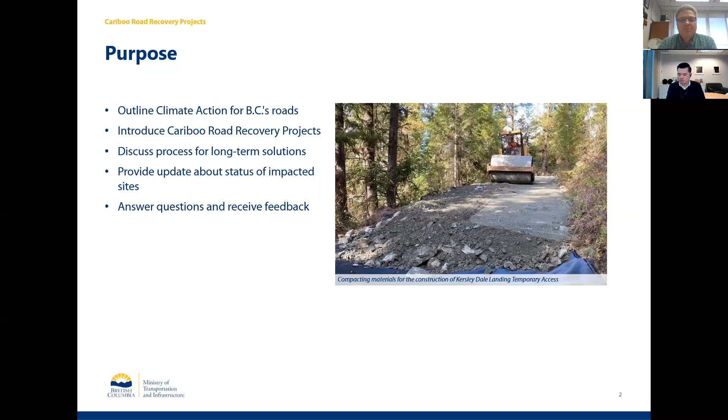Before I get into the Cariboo Road Recovery Projects themselves, I want to take a moment to acknowledge that the entire province, and particularly the Cariboo region, has been impacted by extreme weather events. The Ministry of Transportation and Infrastructure has continued to evolve our strategy to consider this important factor. For work planned around the province, it is a requirement for the ministry's design engineers and consultants to consider how future climate events will affect infrastructure and what can be done to make our roads and bridges more resilient so they remain reliable and open.

Examples include pile driving bridge footings, upsizing culverts, bridging areas of concern where culverts are no longer suitable, redesign of drainage channels for future flow, and better armoring of slopes. This approach means appropriate climate adaptation is considered over the entire design life of our infrastructure.

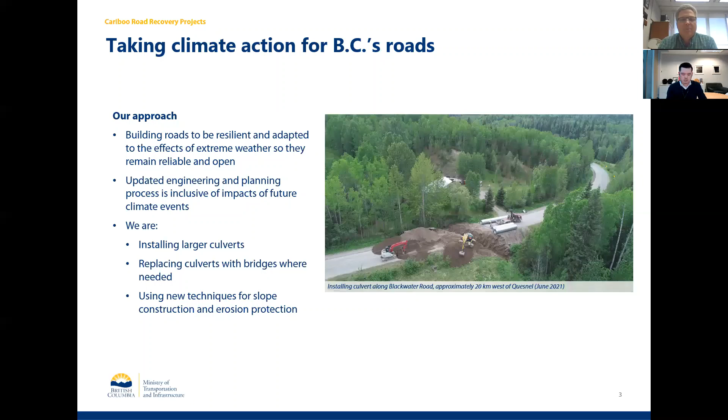To support this, the provincial government, with federal support, has made significant investments since 2017, totaling $580 million province-wide and $230 million in the Cariboo alone. Currently, $146 million has been committed to the Cariboo Road Recovery Projects for engineering work for 9 sites and construction of 1 site, the Kersley Landing. That's a very significant commitment that really is important for the program.

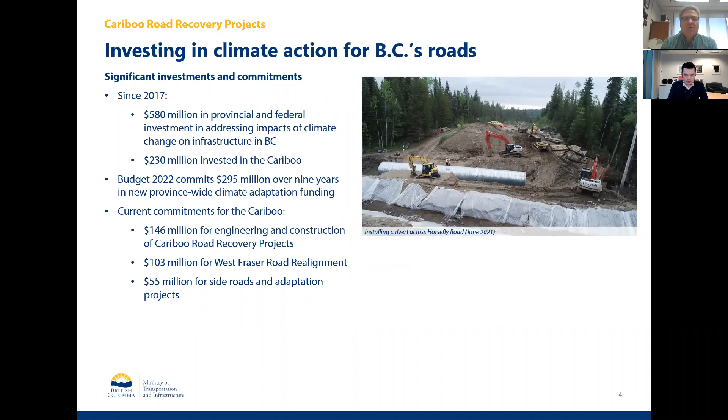As mentioned off the top, the Cariboo region has been impacted by extreme weather events, leading to an increase of water in the ground and landslides since 2020. The Cariboo Road Recovery Projects were formed in the spring of 2021 to deliver safe, reliable, long-term, and climate-resilient solutions for road impacts caused by these forces of nature. To get there, we're going through a thorough technical process and have built a team that includes a broad cross-section of professional experts.

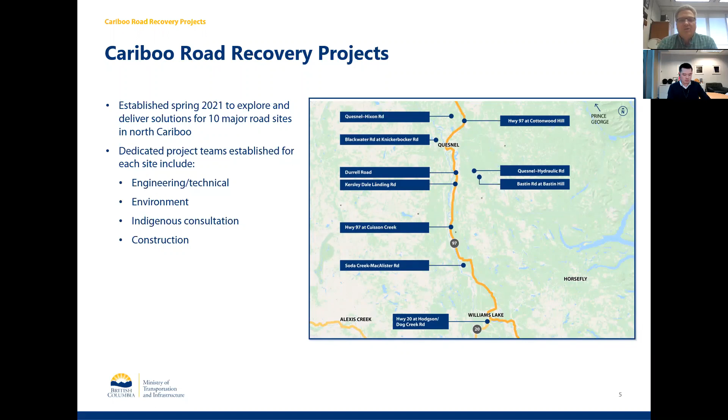We'll also be engaging with and consulting with local residents, Indigenous communities, local governments, road users, and stakeholders to ensure we consider various needs and interests. We appreciate the immediate needs of road users are a priority. Decisions surrounding keeping roads open or establishing permanent alternative access can have a significant impact on one's daily life. We are committed to minimizing these impacts with the caveat that safety has to be first and foremost considered. We have worked to stabilize routes, restoring roads where possible, or establishing alternate routes while we work towards long-term solutions. Some examples have included interim paving to improve the drivability of roads, drainage improvements, and in the case of Kersley Landing, the construction of a temporary access road.

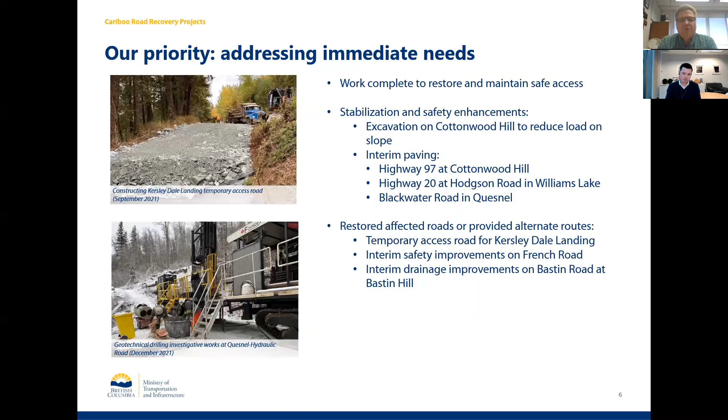To deliver long-term solutions, the ministry is undergoing a thorough multi-phase and technical-driven process. We are currently in phase 2 of a 4-phase process. Phase 1 was a problem definition and needs assessment. During this phase, our teams considered existing, future, and project conditions at each site to help inform the direction of potential options. During phase 2, concept generation and shortlisted option evaluation, we're going through a technical analysis and looking at a number of options at each site. These options are being assessed against multiple criteria to help narrow our list as we head into the next phase.

In phase 3, shortlisted options will be put through a detailed analysis known as a multiple account evaluation process, which I will talk about more on the next slide. This will allow us to identify a preferred solution to be presented to government for approval to advance to the next phase. The final phase is implementation. Following approval by government, we will develop work plans to deliver projects.

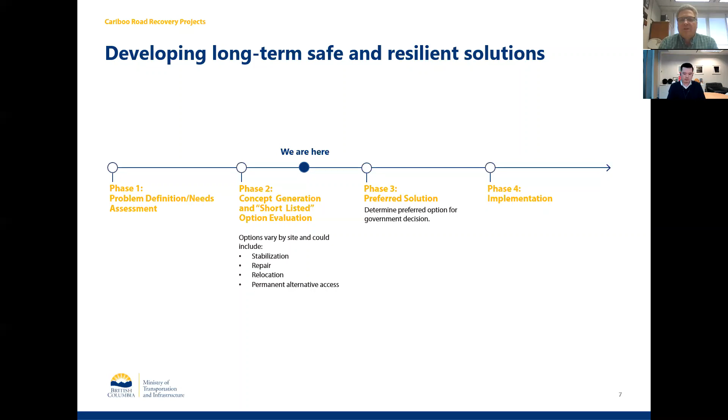So there are a number of criteria that the ministry uses to evaluate potential investments in roads. This is one of the topics we're seeking your input about during this engagement. As with any important decision, there are a number of factors that can influence the ultimate direction you move forward with. This process is no different.

In the discussion guide, you'll find a description of these 5 criteria, but here I will give you a brief overview. Economic development examines the impact of the project on the economy. Some of the things we look at include existing economic activity, like goods movement, and potential development for industries that use these roads.

Customer service looks at the costs and the benefits of the projects to the highway users. Here we're considering things that impact road users like travel time. We're looking at how a decision will impact your daily life, like the amount of time it takes you to get to work or to school, or how the grade of a road may impact cattle movement, as a couple of examples.

Under social and community, we'll examine noise and visual impacts, pollution impacts, land acquisition needs, community connectivity, and consistency with community plans.

Environmental considers impacts of the project on the surrounding environment. We'll look at land requirements, vehicle emissions, wildlife habitat, and water and fisheries.

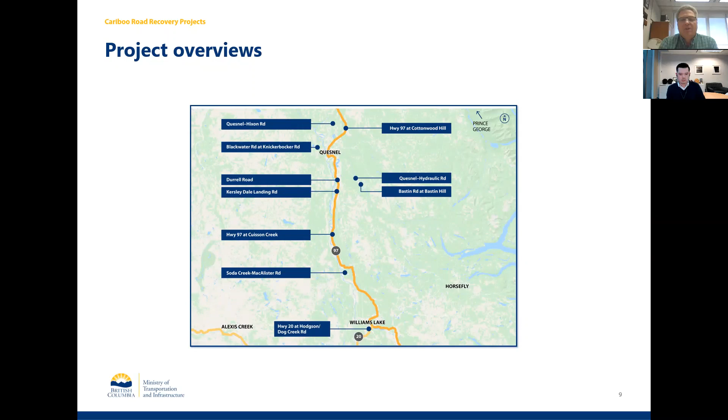So I've talked about our discussion guide and our feedback form, and I'll just add one little piece for you. If you simply Google Cariboo Road Recovery, you'll find our website, and that'll connect you to the feedback form. That'll also connect you to the discussion guide as well. So those are very similar materials to what we're looking at tonight. So if you know folks that haven't seen this presentation, Chris outlined it already earlier, but I just wanted to emphasize that there's still that opportunity to see the information and then provide the feedback to us.

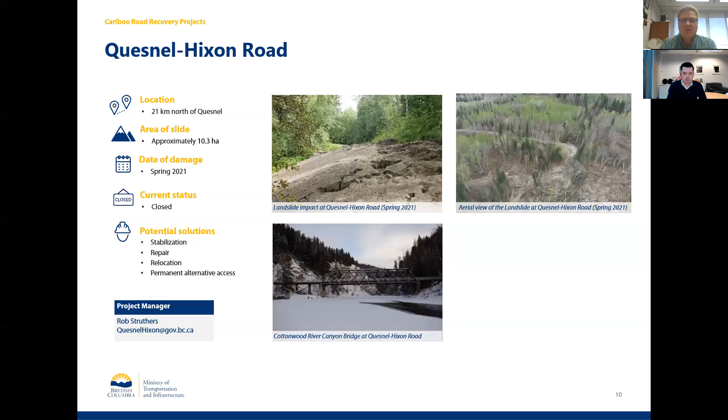So the next slide is an illustration of the slide itself. That's the red highlighted area. The green alignment is the existing, impacted road. The purple and blue alignments are wider options we're looking at, intentionally wide because we need to understand a lot more about them before defining a right-of-way. We need to do more field investigation to understand what we'd be looking at. So what we share here is a sense of the options we're considering for the project, and we'll refine that as we move through it project by project.

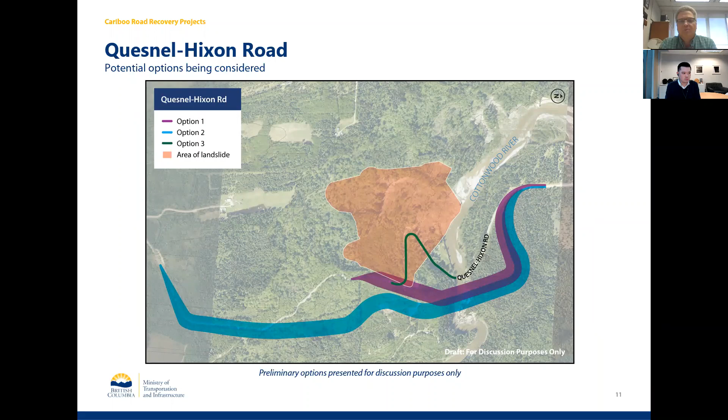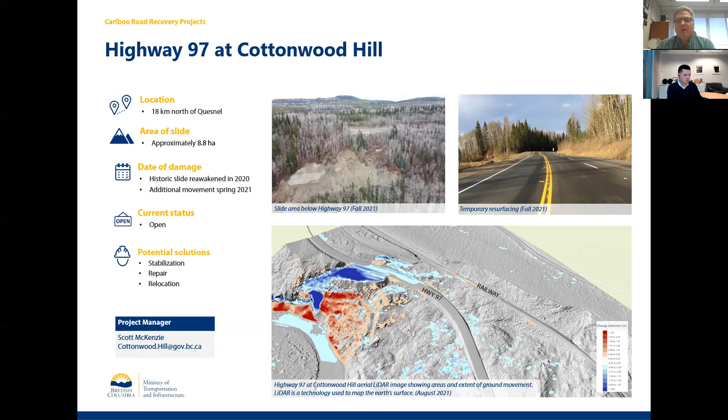Next, we're at Cottonwood Hill. This presentation goes from north to south, so people understand the order of presentation. The next project we'll look at is Highway 97 at Cottonwood Hill. Again, the yellow alignment is the existing highway, and we've got the red slide area highlighted. There are three other options showing alternate alignments being considered for that project.

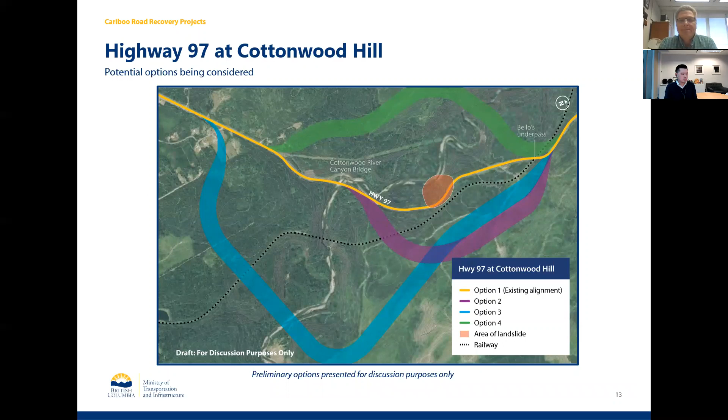Next, we've got Blackwater Road at Knickerbocker Road. I'll just walk you through the images. We've got a slide showing the slide mass, part of one of the slide masses below Blackwater Road going into the Fraser River. You can see some of the temporary resurfacing we did through the project in the fall of 2021.

You can also see the LiDAR imagery in the bottom image. We've taken LiDAR images throughout the course of the last year and compared them to one another, which allows us to see that red essentially is land that's moved down, and blue is land that's moved up. It helps illustrate the movement within the slide. You can see it's actually quite a big area encompassing two slides - the garbage dump slide and the North Fraser slide - both within that area.

The project manager on this project is Catherine Bartlett, and you can see her information on the left-hand side. This is just 9 kilometers from Quesnel down Blackwater Road. We understand this is a very important resource road, as well as connecting a number of residences to the community of Quesnel. We understand the importance of this corridor, absolutely.

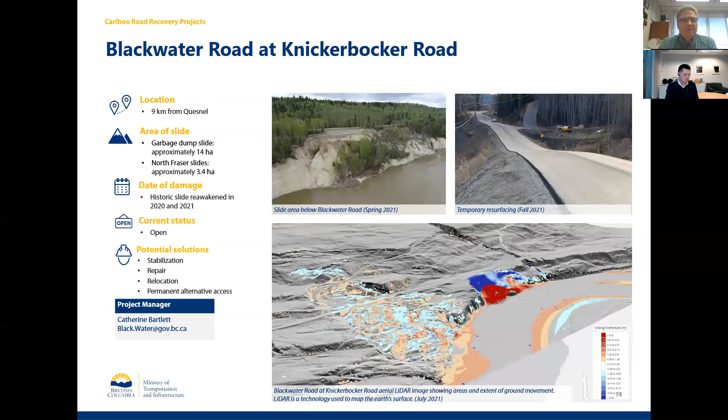The next slide just shows some alignment information. The yellow alignment is the existing road. You can see two red shaded areas that are the slide partway along that yellow alignment, and a gray shaded area showing potential crossing areas we've identified if we were required to cross the Fraser River. We've also got Pinnacles Road highlighted here as well.

I recognize that it's a challenging route - it's got some issues on its own. It's shared between the ministry and the community in terms of ownership, and certainly not something I'd consider an ideal route, but it's an option in terms of emergency access or alternative access, and that's an area we're looking at as part of this study.

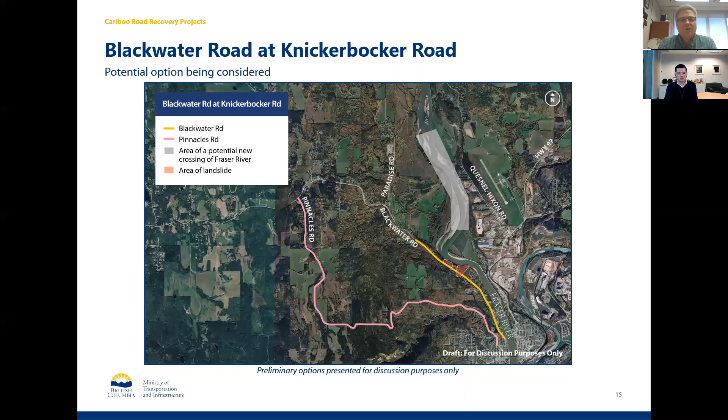Next we have the Quesnel-Hydraulic Road, and again walking you through the images. The top left shows the slide over top of the road there - you can see the massive impact on the road. You can see some of the drilling activities in the top right-hand corner, and on the bottom, some of that LiDAR activity again showing movement through the slide.

You can see that the slide itself that impacted the road is actually part of a much larger landslide movement, so there's lots to look at there. The area of the slide in this case is 13 hectares, so pretty significant in size. Our project manager on this project is Paul Rae, and again there's his contact information for anyone looking to connect directly with him.

This is a slide I'll highlight as having caused very, very significant impacts for the people on the south side of the slide. I recognize the current detour through French Road has had its challenges, and while all projects are getting our priority, this is one I certainly recognize has really had very significant impacts.

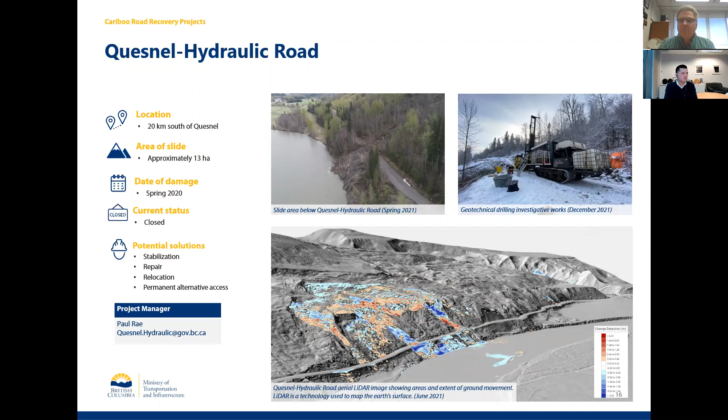This slide is talking about options, and you can see French Road there in purple. That's the existing access that's being provided. And the yellow alignment, you can see the red shaded area where the road is closed there. Garvin Road is also identified as an option, potentially coming back across the river to connect with Quesnel-Hydraulic Road. On the left-hand side of the current alignment, you can see a broader swath considering an alternate route across that land segment.

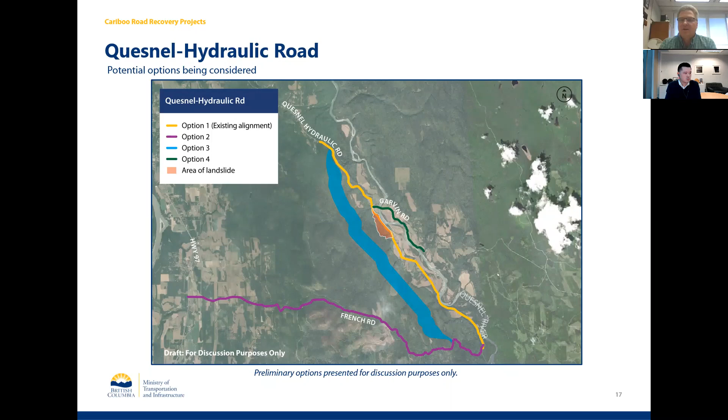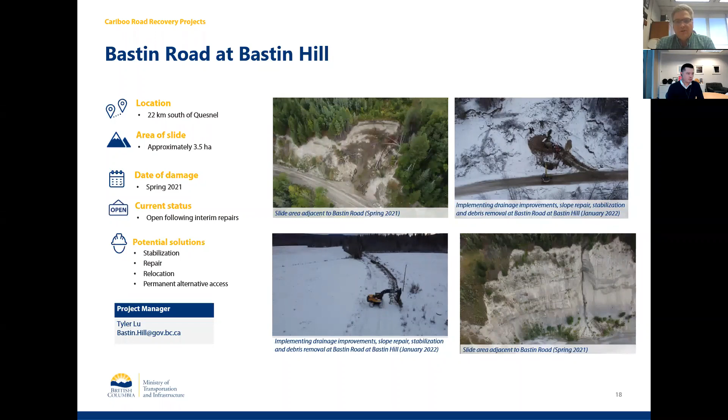Next, we've got Bastin Hill and Bastin Road. This is very close to the Quesnel-Hydraulic site, 22 kilometers south of Quesnel. You can see imagery of some of the slides, and some of the work we've done there to improve drainage and work on the site itself. Our project manager on this project is Tyler Lu, and we've got his contact information there. It's a smaller slide, 3.5 hectares, very challenging, with limited opportunities for crossing this grade.

This illustrates some of the options we're looking at. So certainly the existing alignment, and then three other alignments that are wider swaths, areas that we are looking at as considerations for alternate alignments through that area.

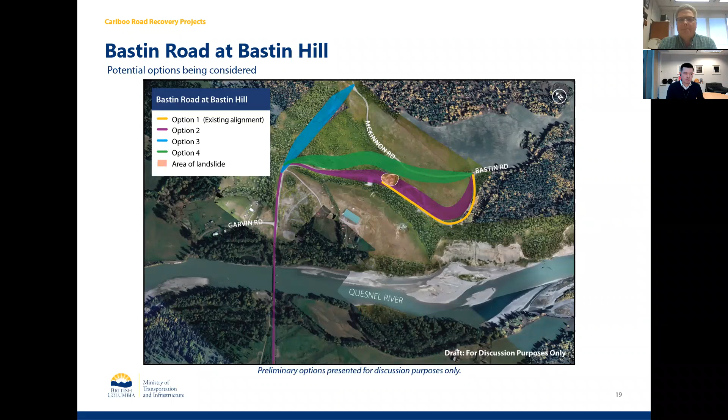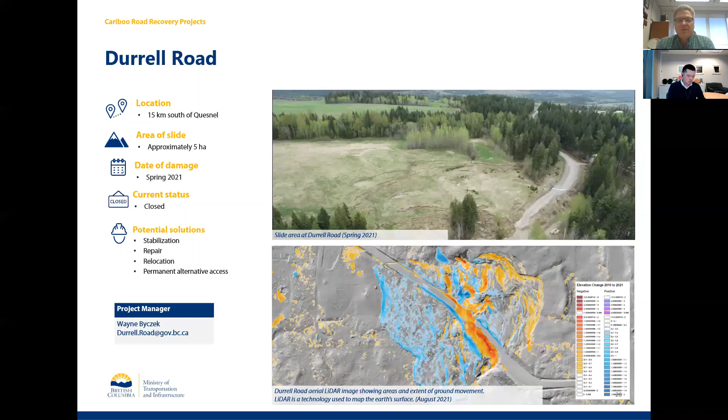Wayne Byczek is our project manager on this project, and I know he's connected with property owners along Durrell Road, and certainly others that are looking to connect with Wayne. We encourage you to do that.

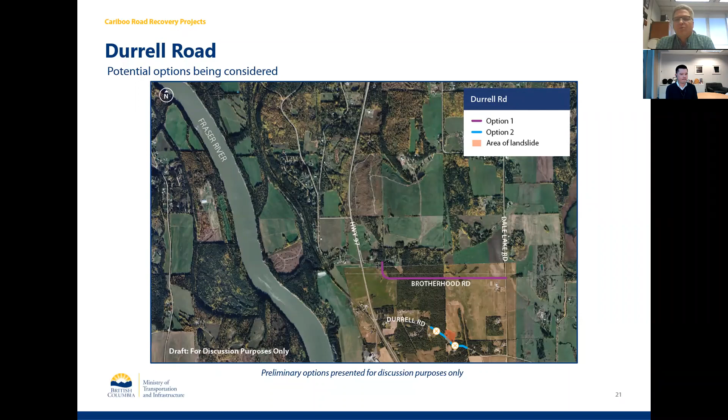So Durrell Road, these are again the options we're looking at right now. We've got the existing alignment with the landslide identified on it in blue, and then we've got an alternative alignment with Brotherhood Road that we're also looking at.

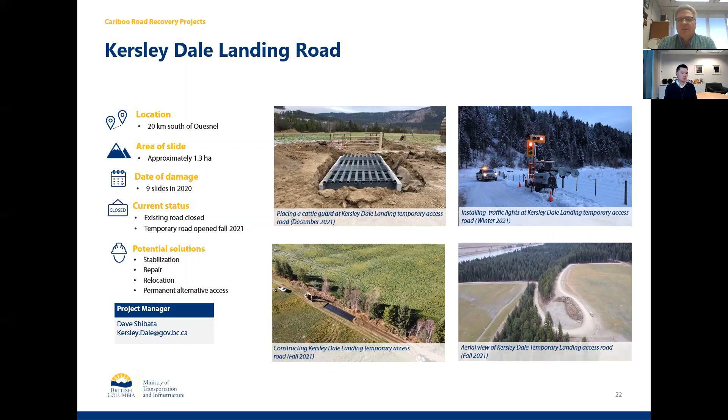So this one, 20 kilometers south of Quesnel, a lot of work has been done there. Dave Shibata is the project manager. We'll go to the next slide and start looking at some alignments.

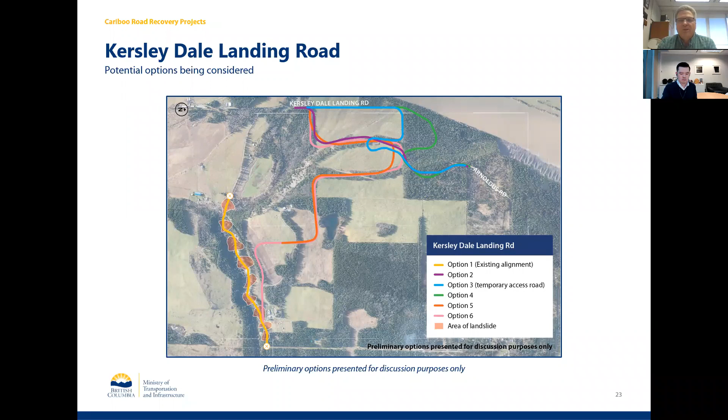Before I look at the other alignments, this one is interesting in that the current alignment is in yellow. If you follow that yellow line along down the screen, you can see the number of slides that all impacted Kersley-Dale Landing Road in that event. A very, very significant event that caused that closure. You can see the alternate alignments that we're considering in this project and moving forward with to date.

So Cuisson Creek is 46 kilometers south of Quesnel. This is a slide that the ministry has been keeping a very close eye on for many years. You can see the proximity to Highway 97 there. And this, like all of these slides, is a historic slide that's been ongoing for some time. That's an important thing to note with this program, that these are all areas prone to landslide over the years. 2020 and 2021 just happened to trigger much more severe movement in the slides, and that's really what's gotten us to today, where we're at the stage we're at.

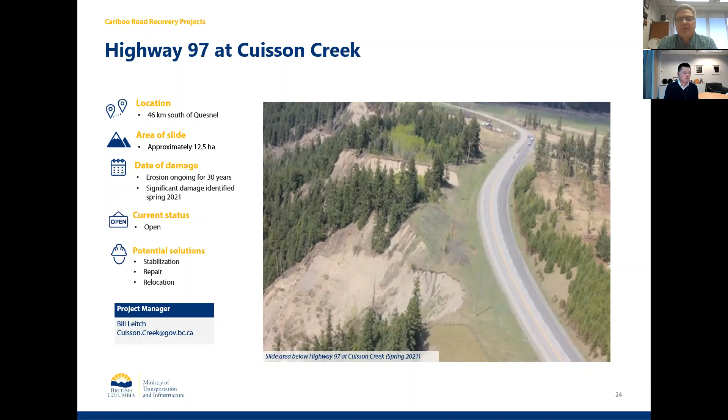So this project, it's threatening Highway 97. Bill Leitch is the project manager on this project. We'll go to the next slide and I'll talk a bit about alignment. On this one, I'm going to point to the red shaded areas. You can see the number of slides on the right-hand side that are threatened.

You can see two slides that are slightly away from the alignment, with the left hand one being very close to Church Road. That road, as well as some other infrastructure, is being threatened by that slide. Church Road is actually part of this project, so both alignments will be looked at.

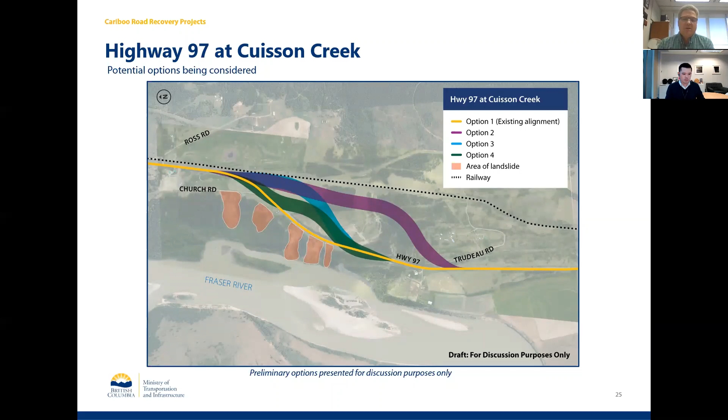You can see we have a number of alignments here. These consider the existing alignment as well as three other alignments. They're wider swaths, taking into consideration that there's some work to be done to refine a preferred option, and finally a right of way through that option.

Next is Soda Creek MacAlister Road. You can see the road is closed, and it has been closed for some time. It's 32 kilometers north of Williams Lake, and it's taken out the road. We've got a stability issue there that we're still considering.

Wayne Bizek is the project manager on this. I'll jump to the next slide and walk you through the options we're looking at. We're looking at the existing alignment, shown in purple, and also another alignment just above the rail that would take you across the same terrain to the other side.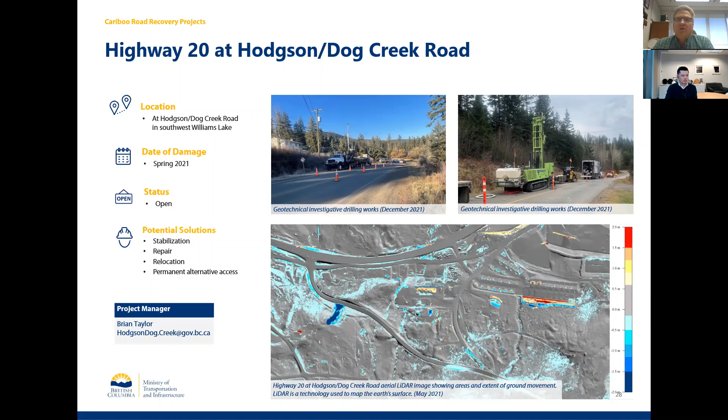This is a complicated jurisdictional project because ownership is split between the municipality, the regional district, and the ministry. We've also got utilities in this area that have to address their own issues with the slide. All four parties have been taking different looks at this slide. What we're doing with this program is bringing all four parties together to work collectively on long-term improvement solutions and move forward from there.

So like the other ones, it's highway right of way we're dealing with, but in this case it's a bit wider and involves multiple parties. You can see in the imagery there's been a lot of work going on, some of it reflected here - hydrological investigation and a lot of geotechnical investigation.

We're excited to finally move forward - I know this has been an ongoing issue, and you can see from the imagery that an entire part of the community is involved in this slide, which is very concerning. We're excited that we can step forward and play a leadership role in this one. That's the Hodgson slide.